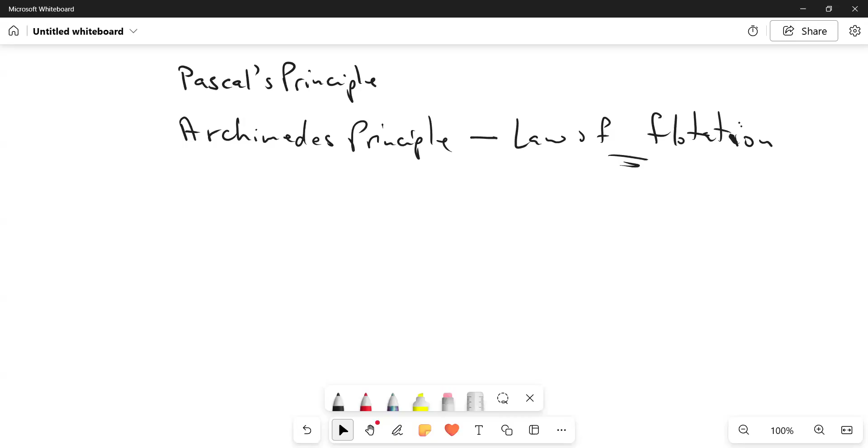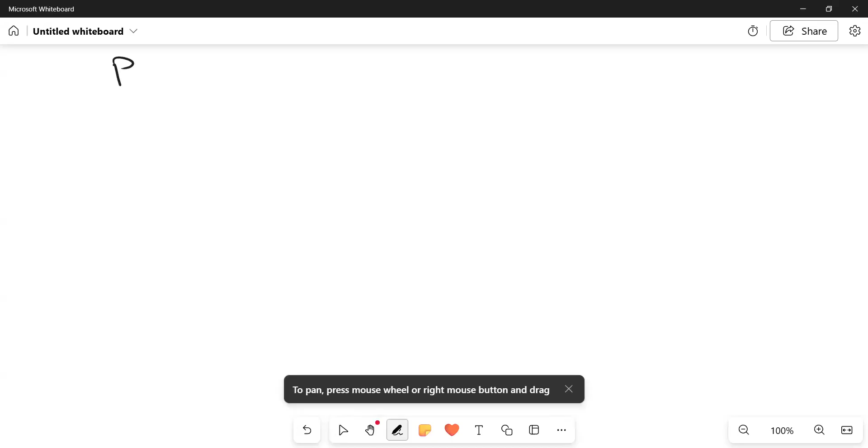So let's do this little bit here, right? And let's start with Pascal's principle. And I'll just give you a little. Let's see if I can. So we're starting with Pascal's principle, right? And I want to share with you a very practical setup that I think you probably visited a mechanic shop and you see this, right? You see this sort of thing. Give me a second. See if I can snip it. I'll bring it home.

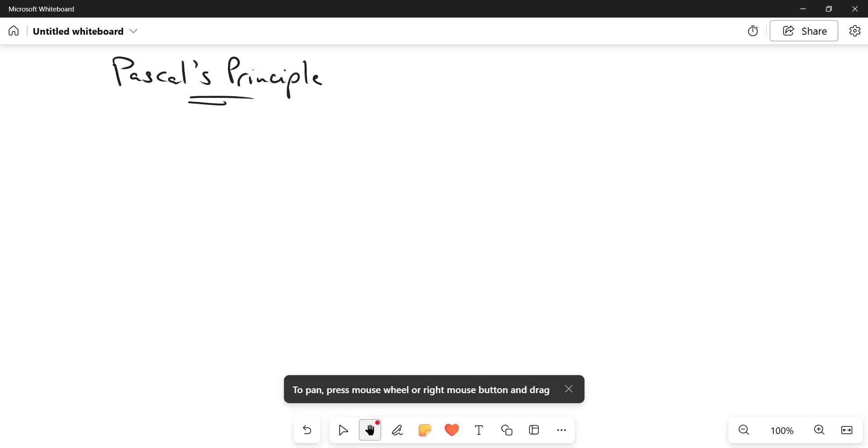Yeah. I don't know if you ever see this kind of setup. Not exactly this, but a little piece of equipment that they have inside of some of those established mechanic shops, right? Anybody ever saw something like this where they take the car in and there's a little mechanism there? It doesn't look exactly like you see here, but the whole idea is that they have a little piece of equipment and they put the vehicle on it. And a little guy would be cranking the thing with his hand, maybe.

Some of them are hand crank, some of them actually have a little bit of an electrical mechanism that would cause it to make the car rise up into the air. And they can go at the bottom of the car now and see what's going on. Anybody ever visited a shop and they did that with your vehicle? Yes, sir. Yes, sometimes, sir.

Let me just, yeah, it looks like this here. So they have something here and then something here, right? And there's some kind of mechanism down here that goes under the car. So here's the car. Okay, well, this is the ground, right? This is the ground here. The wheel is here. All right. Sometimes they take out the wheel and all of that. And this little mechanism here, they'll do something, and then next thing you know, this thing just goes up, right? Goes up. And the car is in the air.

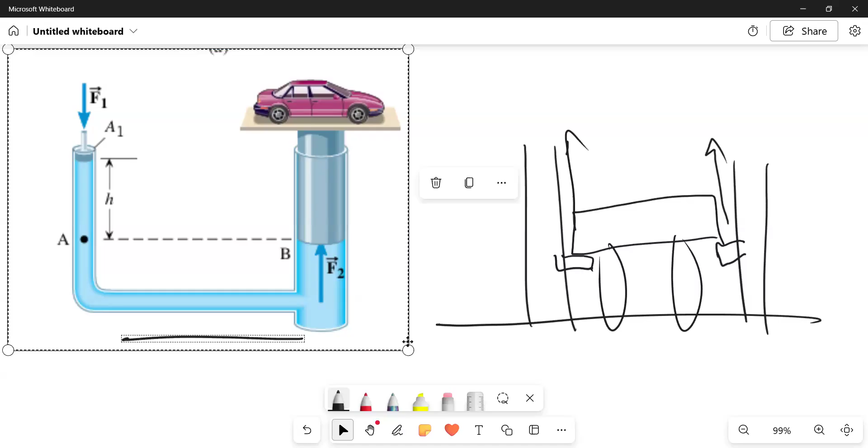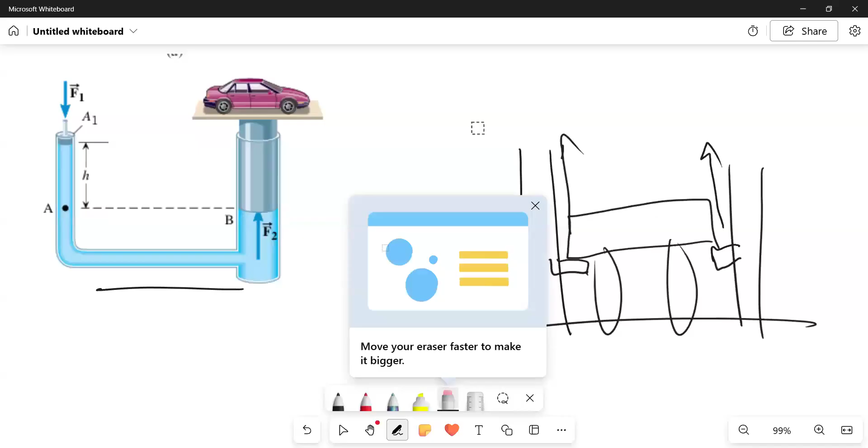Yeah. So this here is based on what we call Pascal's principle, right? And let me just bring over what Pascal's principle is all about. Or let me go back and I want to get rid of. Yeah. Pascal's principle basically is saying that, okay.

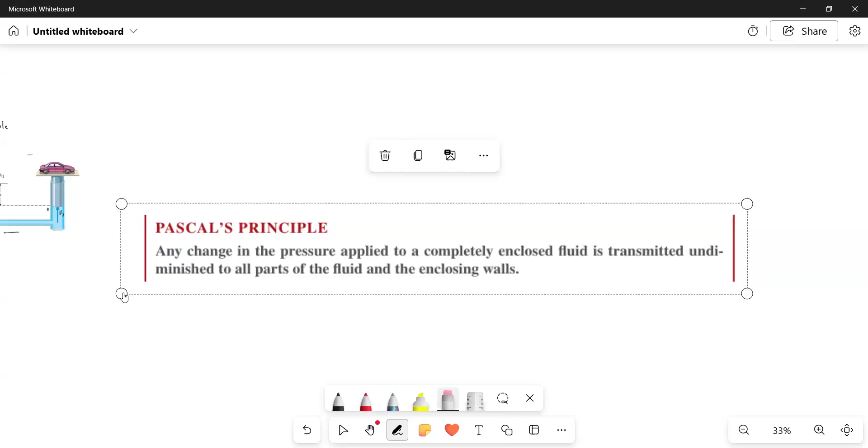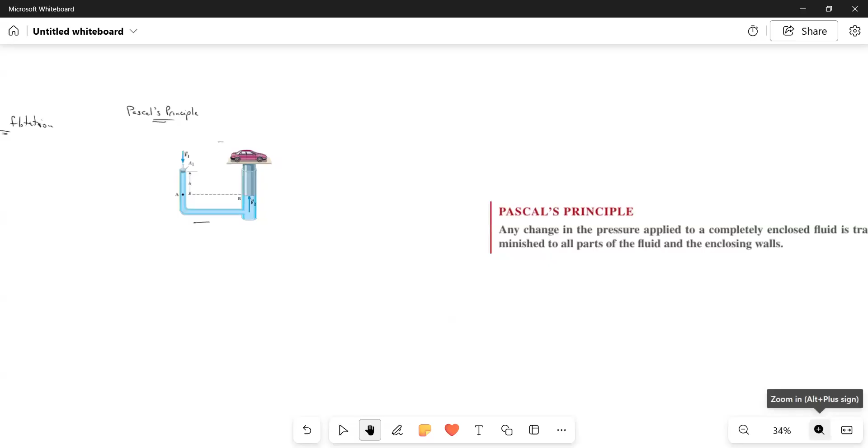I don't know why this. Hmm. All right. Yeah. I'll come back to that.

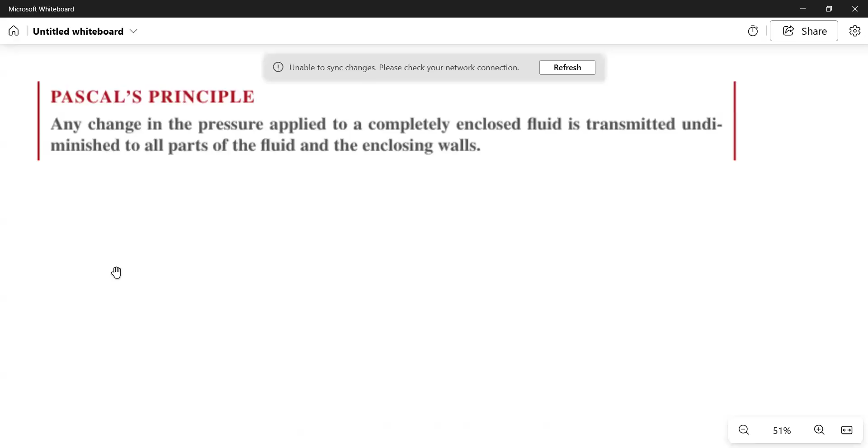Yeah. This is what Pascal's principle is saying. It's actually saying that if you have a change in the pressure applied to an enclosed fluid, that pressure is going to be transmitted to all parts of the fluid. So if there's a change in pressure in one part, it's going to transmit throughout the liquid, right? Or any fluid. It can be gas too, right?

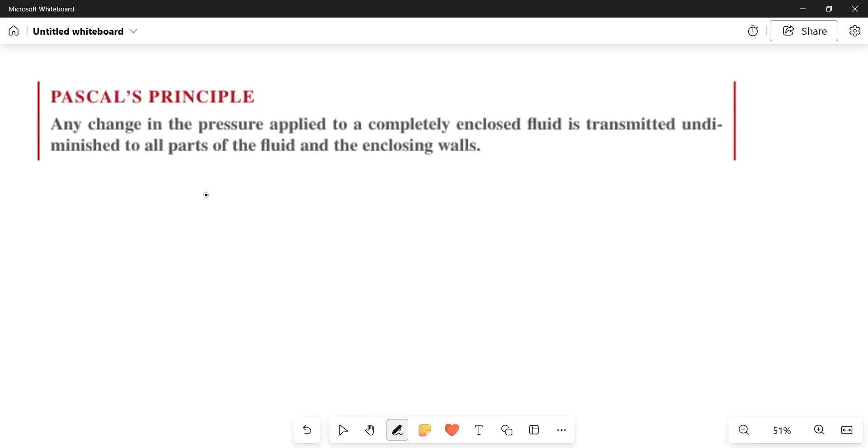So Pascal actually came up with this relationship. And he said that, look, of course, he did this mathematically, right? They take some measurements of pressures and so. And this is what he found out. He found out that, okay, if the force in one area of the fluid divided by the area of the fluid that it takes up, right, is equal to the force in the other area of the fluid over the magnitude of the area in that area, right?

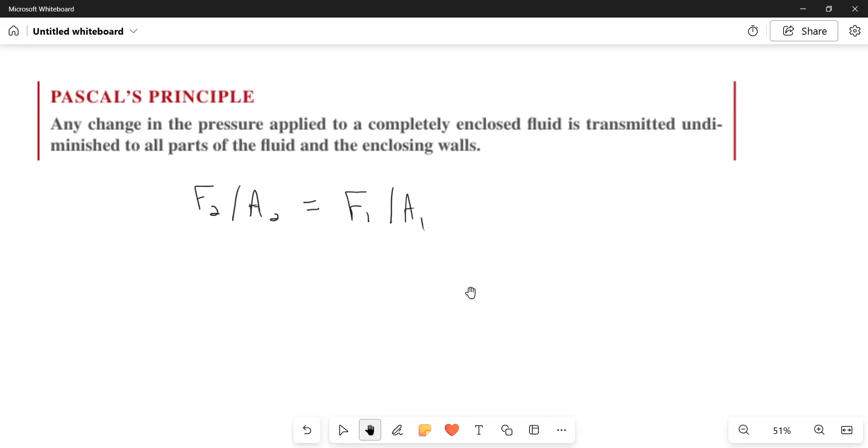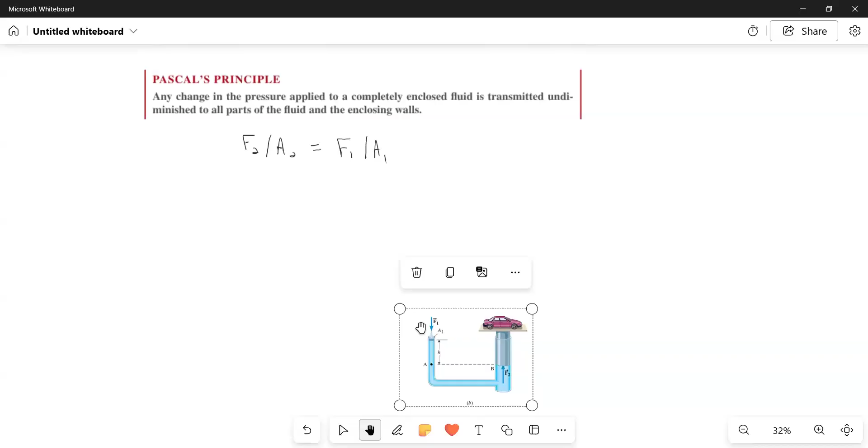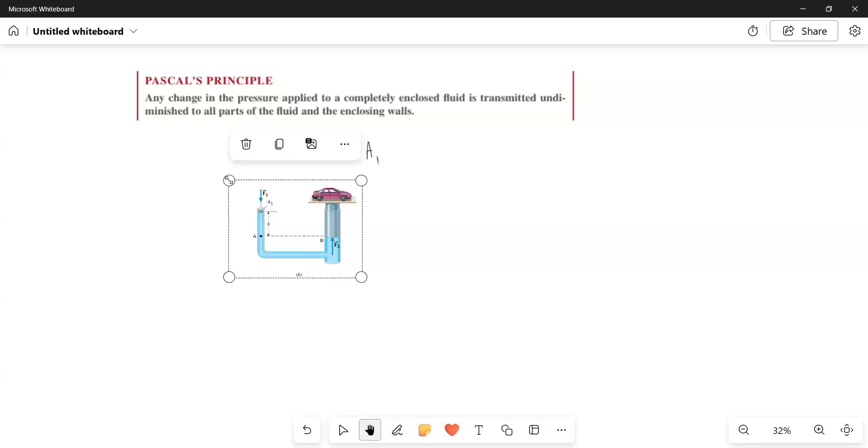So if I were to just, let me see if I can catch back this. See if I can take back this picture here. No, no. Yeah. Ah, man. I think I have to more use maybe, yeah. All right, let me get it here.

Yeah. So looking at this diagram here, right? And if we were to rearrange this whole arrangement here, right? What you would see here, I wonder what this is all about. Yeah. If you were to rearrange the formula, you will have F2 equal to F1 times A2 over A1, right? If you take this and you rearrange it, you get that, right? Mathematically.

So if you want to create a large force capable of lifting this car up, right? You want to create a very large force that would virtually lift up this car. You could use a very small force, right? I mean, comparatively small. But this is the part of the formula that you can manipulate. The area, or the cross-sectional area here as compared to the cross-sectional area here. The larger this area here compared to this area is going to multiply this force, right?

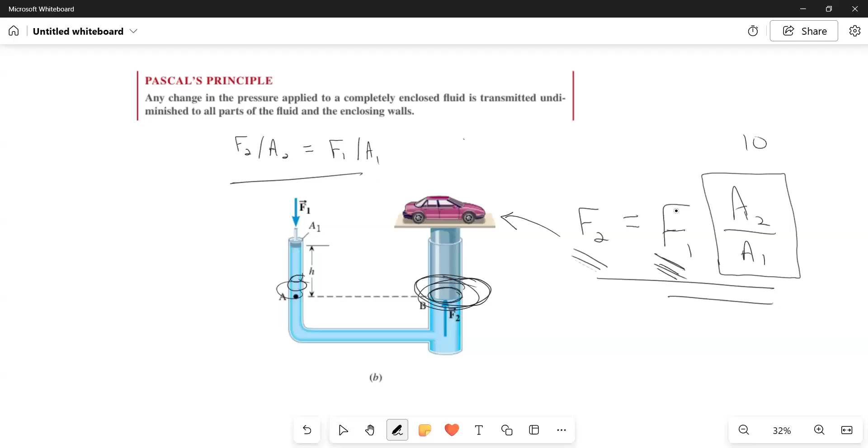So let's say the area of this part here compared to this part, it's 10 times. A2 over A1 is 10. What it does to this force, it multiplies the effect of this small force. So if you want to create, let's say, 10,000 newtons, you only have to have 1,000 newtons here, right? And because of the relationship of these two areas, if A2 over A1 is 10, you can actually exert a force of 10,000 newtons over here. This F1 that you're seeing here is going to be multiplied by 10.

And based on this principle, right? And it's true. It's generally true. I think in all of this, they didn't take into consideration all the weight of these pistons and so, right? But forget that. That's complex physics. But you can actually then multiply the effect of a small force.

And that's why, I don't know if y'all probably change a tire. Those small jacks. Oh yeah, I should have used that instead of the one in the mechanic shop. Most of you here, you know that small jack that you use to jack up the car? Most of you own one of that, right? And they have a little lever, and you crank it with your hand. And do you put a lot of force into that thing? Anybody use it before?

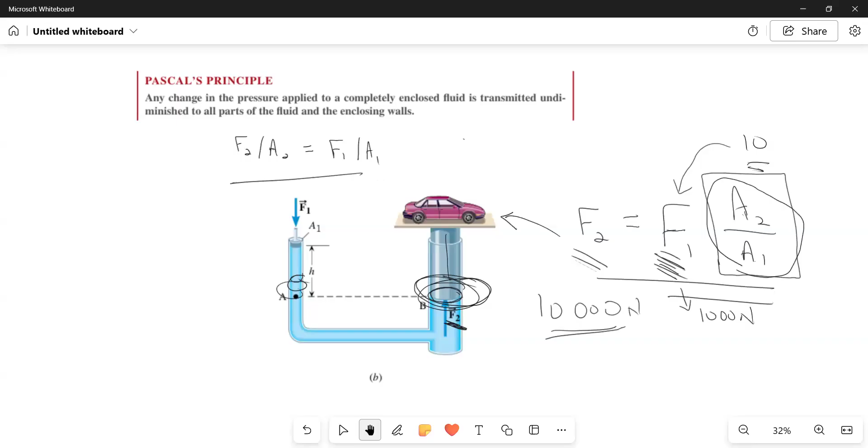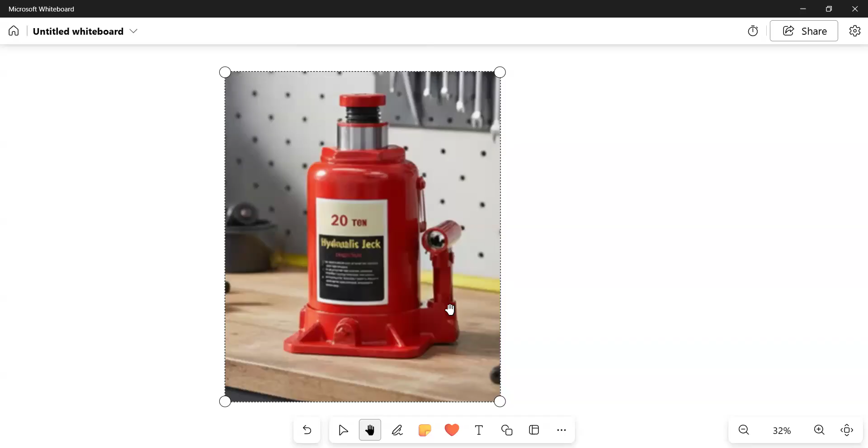You notice here, well, what is happening? It's not showing here, but in this tube here, in this part of the crank, you notice how the area is small? Y'all notice that? Good. This bore here. The cross-sectional area of the bore is very small, but look at the cross-sectional area here. It's probably about 100 times the cross-sectional area here. It's like this compared to this. Times 100. Right? That's all.

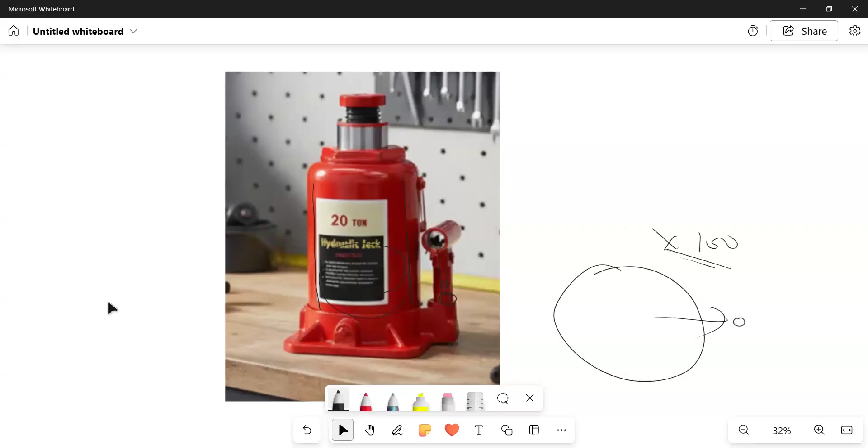So whatever force you exert on this small crank here is multiplied by, let's say, 100. You get what I'm saying? And that's what Pascal's principle is saying. I wonder why the class seems like they're lost or something like that. Yeah, so that's the principle here, right?

You could use a very small force, but in the equipment you're using, the area of this part here compared to this part here is a big fraction. A2 over A1 is a very large number, probably 10, 100, as I showed you in this case here. In this case, the cross section of this bore here, where you are cranking the oil inside there, right? And remember, there's oil inside this thing. So you're going to exert a small force here, and it's going to translate into a large force here.

And granted, your hand is going to work a lot, but then you see the car moving little by little, right? So it doesn't move fast, but it moves slowly up. Speed is not what you want. You want to multiply force. And you have the car lifted up.

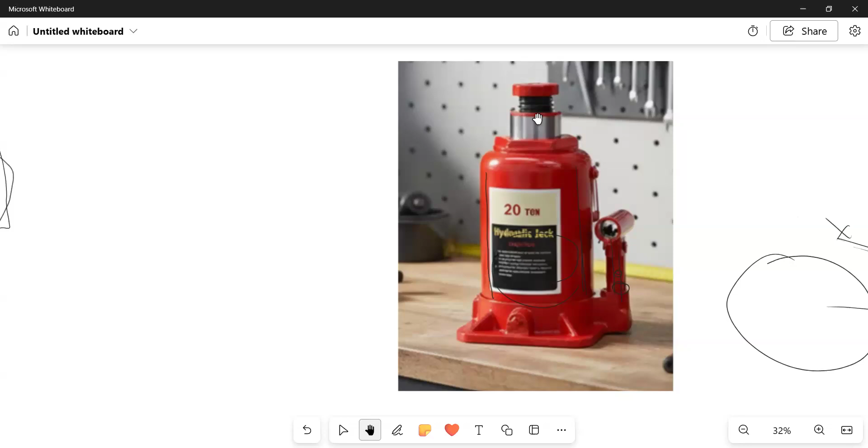Right? The other day, one of the posts on my house was rotten at the bottom. And I bought, I think it was a 10-ton jack. And I actually lifted the whole house, the front. I lifted the whole thing up. And I cut out the bottom of the post and I put in a piece of wood and I painted it up nice, and that's it. So I lifted my house up. Just imagine. Why? Go right back to Pascal's principle.

Anybody? I remember talking to this class, and some people were saying how they worked in industry, so does anybody work with this kind of thing? Anybody work at maybe a workshop where such a device is used? Nobody?

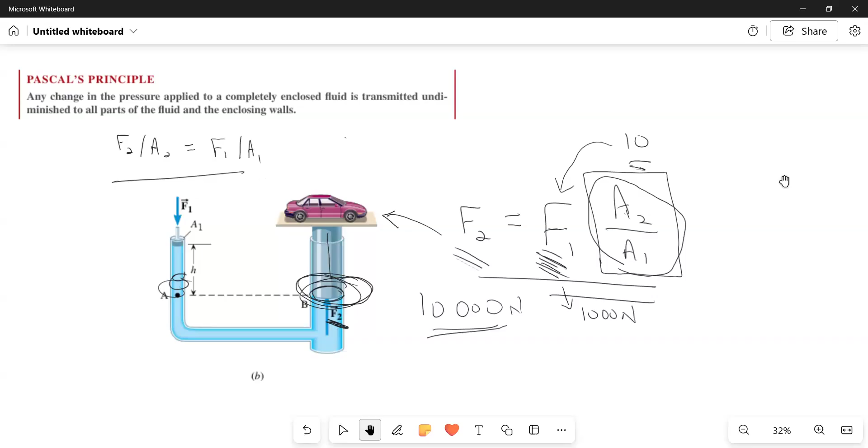Hmm. All right. So something strange with the class this afternoon. We're probably not getting the kind of... Yes, the persons who work in the industry that you're speaking about are at work. Yeah, yeah. All right. Because most times they work from 6 to 6. Yeah. Well, that's the next thing, y'all gotta get your union involved, and well, God knows if you have a union there. But oh my.

When you've got to work those long hours, I mean, if from time to time you do it, yes, but... well, I wonder why this thing is.

Let me see if I use Control V. Yeah, this is what I'm talking about.

You can't do that every day. You know, people forget something called family life and all of that. You need to have some time to yourself and so on. You can't work from morning till night. You have to have time for the family, and that's why you want to develop yourself to the point where you don't have to work those long hours because of your skill and your knowledge. You could work for less hours, right?

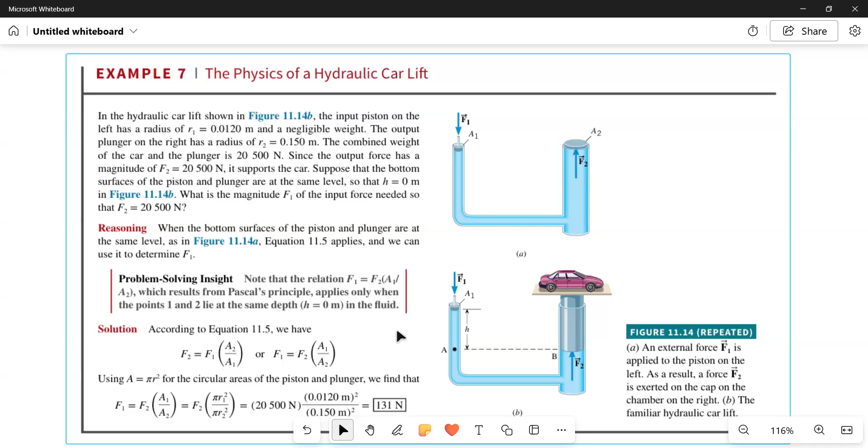The weight is 20,500. So you want to make sure that you can lift that car that has a weight of 20,500. So we're using the formula here, and notice we rearrange the formula so you can find F1. In this case, you didn't want to find F2, you want to find F1. So F1 is going to be equal to F2 times A1 over A2. Notice the switch around. It's not A2 over A1 this time, it's A1 over A2. If you know a little bit of mathematics, you'll understand why.

Good. So for F1, you put in all the numbers. F2 is 20,500. A1 is given as 0.012. A2 is given as 0.15. Oh, by the way, that's the radius. You have to find the area. Area is pi r squared, the area of a circle. So they give you the radius, you have to calculate the area. Put all those numbers in and look what happens.

F1 turns out to be 131 newtons, which is not very much, right? If you want to put this in terms of a mass, divide this by 10, it's about 13 kilograms. The amount of force that you would need to lift 13 kilograms. 13 kilograms is about 30 pounds. So if you were to lift an equivalent of 30 pounds, you only need that to lift this big car.

Just imagine. The amount of force you have to exert is less than lifting 30 pounds, all because of the physics. This little device harnesses an idea in physics, and we're able to lift that car and work underneath it. The mechanism they have is more practical. This one is very impractical. Lifting the car up there doesn't help you to see underneath. But the one they have in the workshops allows you to go underneath there.

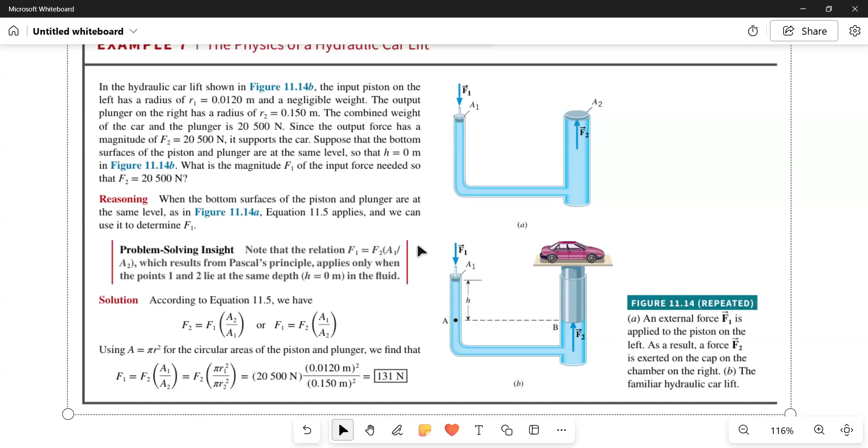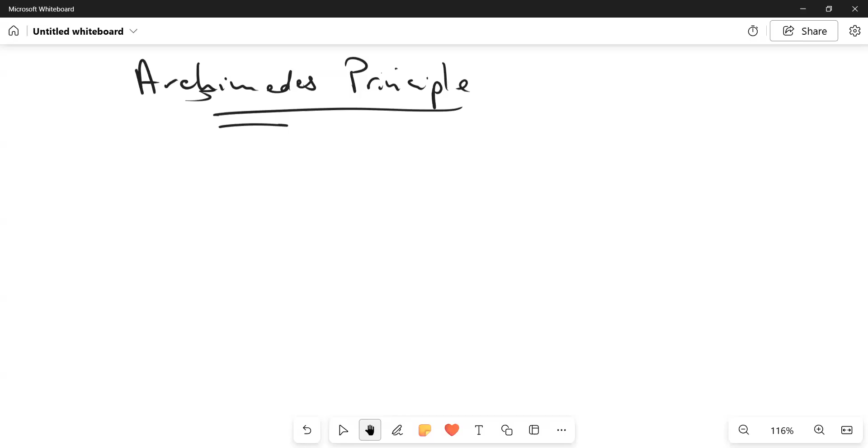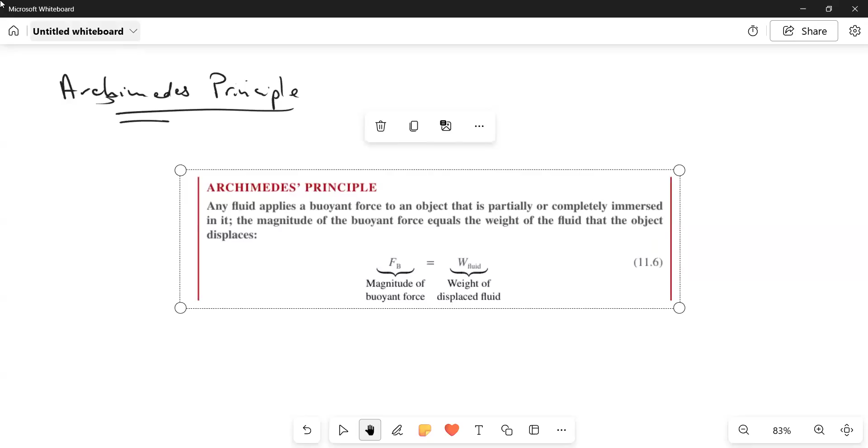I want to move away from this now and talk a little about Archimedes' principle. Archimedes was an old Greek scientist. And Archimedes' principle basically says this. Let me take it from the notes we had over here. Everybody can see that? Yes, sir.

So what Archimedes is basically saying is that when a body is immersed in a fluid, it will experience a certain amount of upthrust. That fluid is going to push up at that body, right? And you can have two situations. Well, before I go to that,

there's a really humorous story. Anybody know the story about Archimedes? Yes, sir. What was it all about? Give me a little bit there. Basically, he was in a bathtub and he realized that when he goes into the bathtub, some amount of water is being displaced. And then he figured out that it's proportionally displaced.

Okay, yes, that's in a nutshell. The background to it was that the king he was serving at the time suspected or wanted to know, "I'm giving these people to make jewelry for me." He would give goldsmiths gold to make jewelry for him. And he was wondering whether the goldsmiths would actually dupe him and mix in certain other metals, maybe put a lot of copper in the inside of the gold,

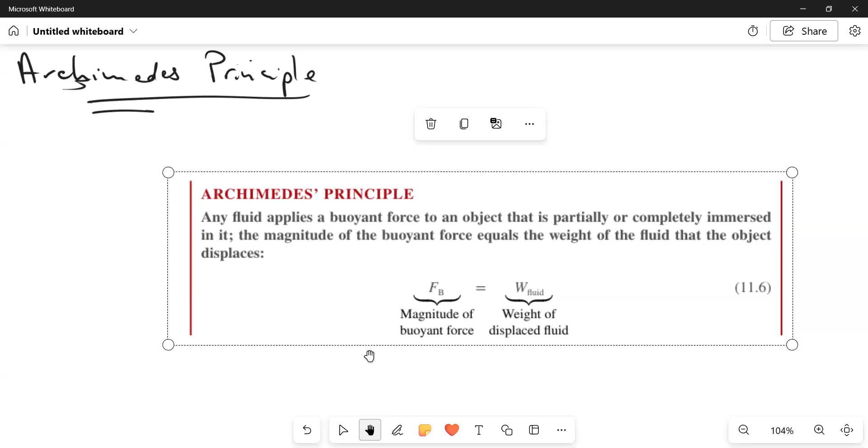And therefore, a crown that is made of copper is going to experience, if you were to put them, let me just show you. There is one theory. Let me just draw that. There's one theory that Archimedes could have taken two identical containers with water, right? Put up a balance here. Okay, he has a balance. And you tie on the gold, okay.

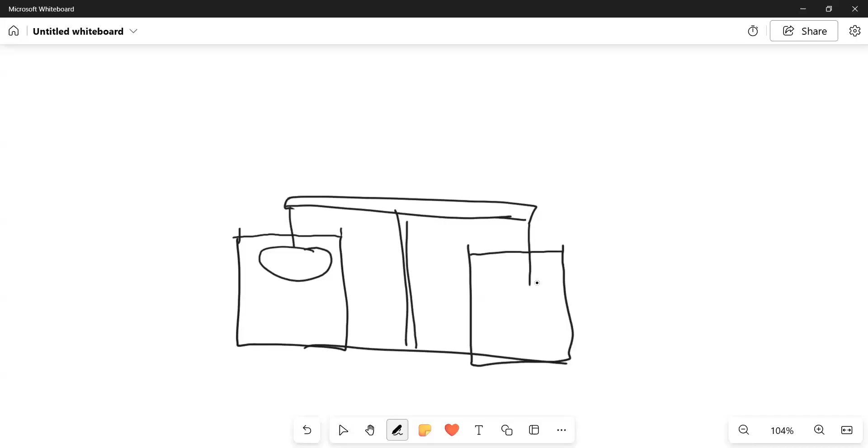The water is there, all right. So the thing will dunk in water, right? And then up here, water. And you tie on the crown that is made of, let's say this one is more copper, right? I mean, gold plus copper. Let's say this one is pure gold, right? Pure gold. What do you think will happen when he starts off the experiment here? What do you think will happen?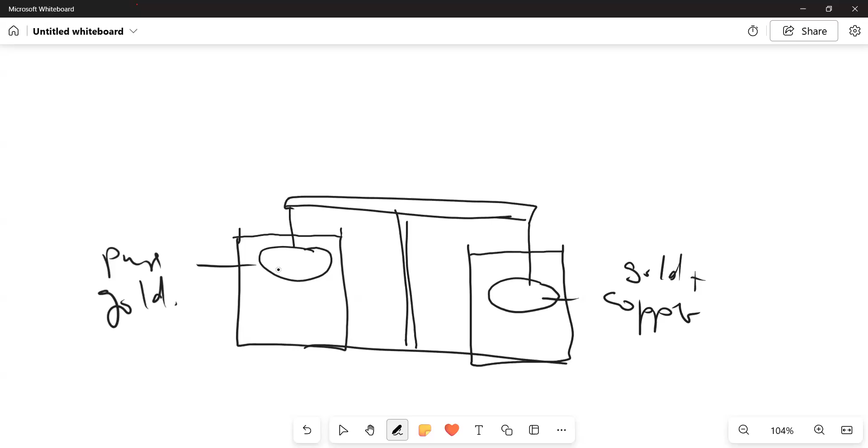So these two gold crowns really are identical, right? What will happen? The heavier one, the one made of pure gold, would go down. Yes, and this one will go up. Yeah, right? As a matter of fact, you don't even need to put the thing in water. I would think just air, just immerse it in air and compare the two, right?

And the pure gold is going to be heavier than the one with gold plus copper. You understand? It's going to be heavier based on the density, right? Based on the density. So yeah, he didn't even need the fluid, right? He didn't need the fluid. I don't know why he insisted on it.

Yeah, he came up with this idea and he was able to determine whether... I don't know the true story. These stories are told over and over and over, and you don't know what is fact from fiction anymore with these things. Yeah. So Archimedes came up with that idea that

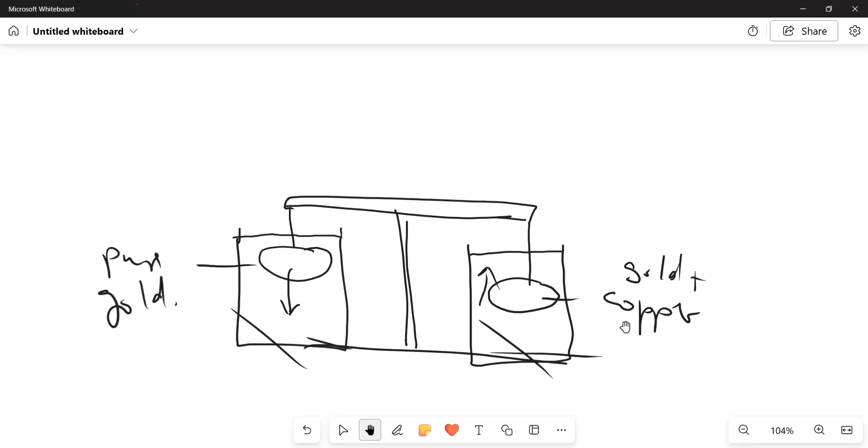objects would experience a certain upthrust, right? They'd experience an upthrust, and that upthrust, it's related. Let me just go back and see if I can. In the notes I gave you, I don't know if the formula is there somewhere in the notes.

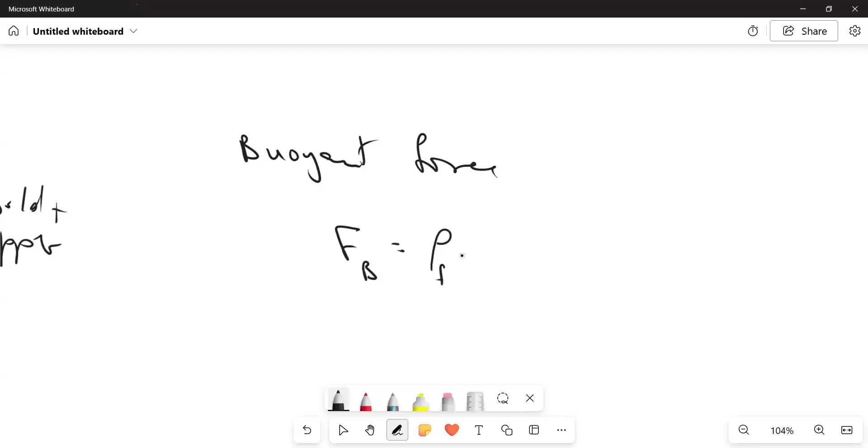The upthrust, which they call the buoyant force. Buoyant. I think I spelled the word wrong here. Funny how this word is spelled, right? This word is spelled B-U-O-Y. The buoyant force experienced is actually equal to the density of the fluid times the volume of the fluid displaced times g, right?

That's the buoyant force that is going to be exerted on this object that you immerse inside of a fluid, right? So whatever is the density of the fluid, here it's water. How much volume is displaced, right? And g is acceleration due to gravity.

So what this would mean is that when you immerse things in water, if you were to take... so this is water here, right? You were to put an object inside here, and you were to tie it to a string, and on this string had a force meter. They're called Newton meters, right? A force measurer or a Newton meter.

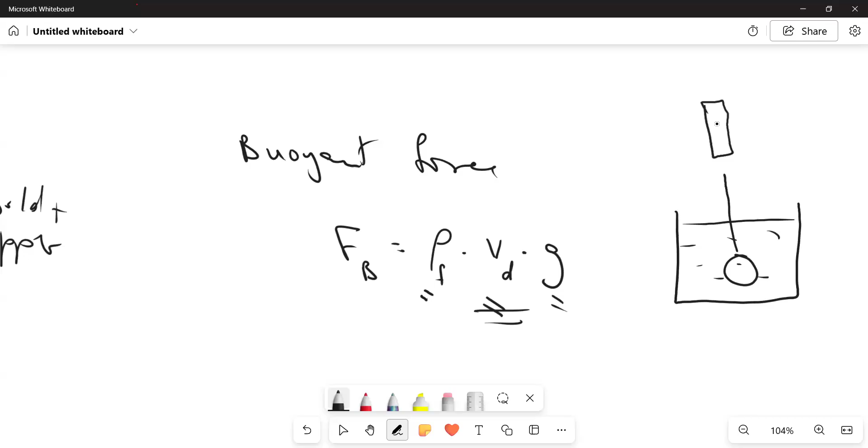So you have a little... it resembles that thing that some people have. It has a hook here, and the thing hooks on there, and it will have a calibration here. So if you were to weigh this stone, and maybe it's 1 kilogram, when you put it in the fluid, it's not going to weigh 1 kilogram anymore, right? It's going to weigh a little less.

Why? Because there's a buoyant force pushing up on this object here, right? F_B. It's going to push up on that object. I think I'm giving you the raw... This is a force measurer or a Newton meter, so it will normally register in newtons, right? So let's say the weight of the object is 10 newtons.

You might find that when you put it in a fluid, it's now 8 newtons. Why? Because it experiences a 2 newton buoyant force, right? So now the weight of the object is just 8 newtons. It's a little lighter. And how does that come about? Well, it displaces fluid, right? Okay, let me explain why that happens.

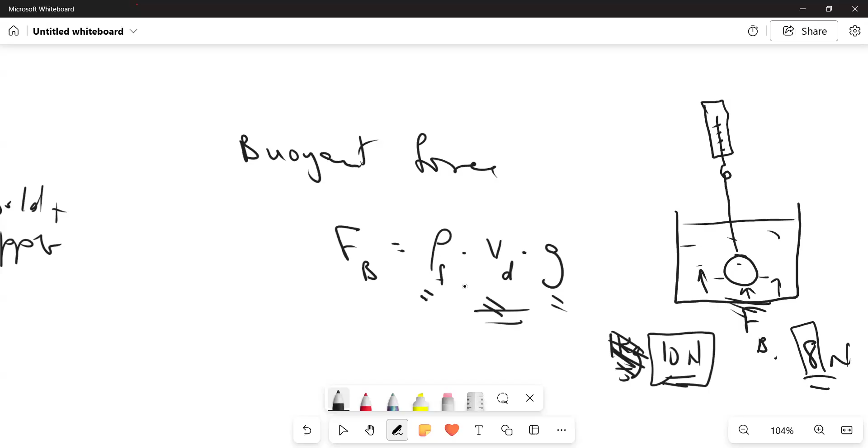Let me see if I can draw that. All right, so let's say the level of the water here is there. So you put a stone inside this water now, right? The water wouldn't be at this level anymore. No, it's going to be a little higher, right? So the water is going to come up to here now, a little higher than down here.

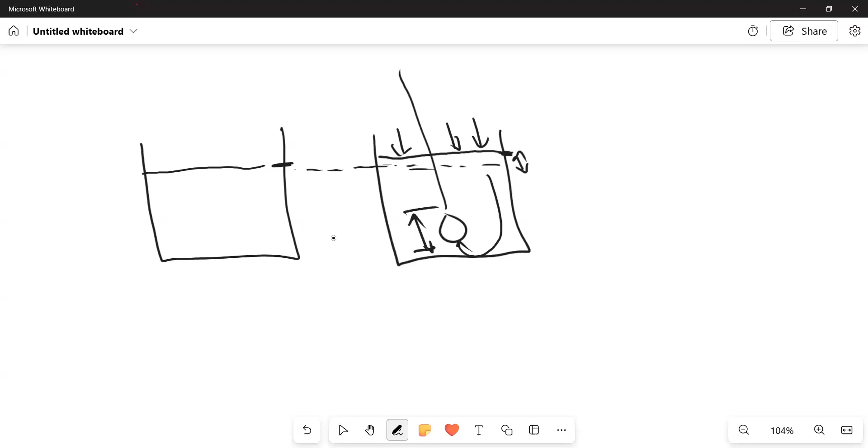Now this difference, because the water actually is a little higher, the pressure above here is going to push back at that water, and that pressure is translated to that object, right? As a matter of fact, there is a pressure difference from here to here. Remember we talked about P = hρg? And that pressure difference is what is going to cause an upthrust force, depending on the area. We use a spherical object here.

But if you were to use a cylindrical object, you could actually calculate the pressure difference, right? And know that force that's going to push up on that object. We're not going to do too much of the mathematics, but I'm just showing you where that force originates, right?

Because of this displaced water, remember the atmospheric pressure is pushing back at that water, and that's going to create a force that would give this object an upthrust. You can also think about it: the difference between the pressure up here and the pressure down there creates an upthrust, pushing it upwards, because of that pressure difference.

By the way, this has a lot of uses, right, a lot of uses. Anybody here lives in an area where they do cane cultivation? Yes, sir. And you would know that we make use of punts. You hear of that word, punts? Yeah, we make use of punts. What we do is that we pack the cane in punts and we float them in the canals to the estate, right?

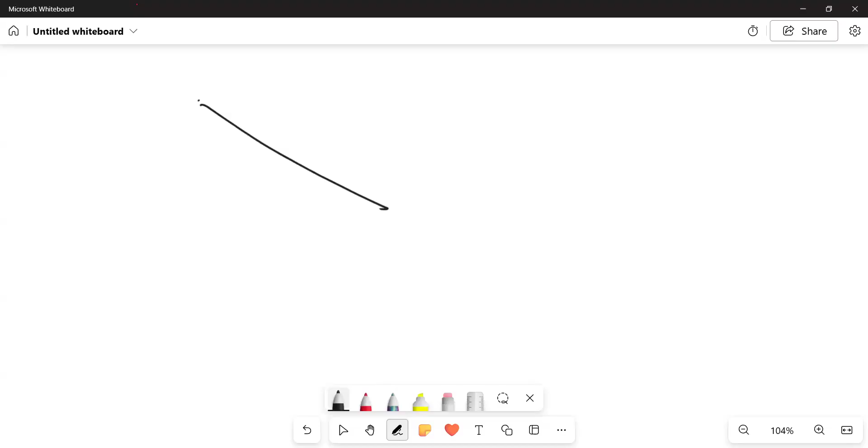plate of steel, roughly, right? Let's say it's 1 meter by 1 meter, and the thickness of the steel is, let's say, 0.01 of a meter, right? Which is like what? Oh, that's too much. That's like 1 cm. That's rather thick. All right, let's go with that anyway. It's not a very good example.

Good. So if you were to take this steel plate, the volume of this thing will be about what? 1 by 1 by this will be what? 0.01 meter cube, right? That's the volume, V. And the density of steel is, let me go with a number like this, 7,850, right? The internet gave me this one. 7,850 kilograms per meter cube.

So when you think of the upthrust that is going to be experienced, let me go with the mass or the weight, right? The mass is going to be equal to 7,850 times 0.01 kilograms, right? Which is roughly 78.5 kilograms. I hope I'm getting all my numbers right. Yes, sir, it's right. Good. So the mass of this piece of steel is this.

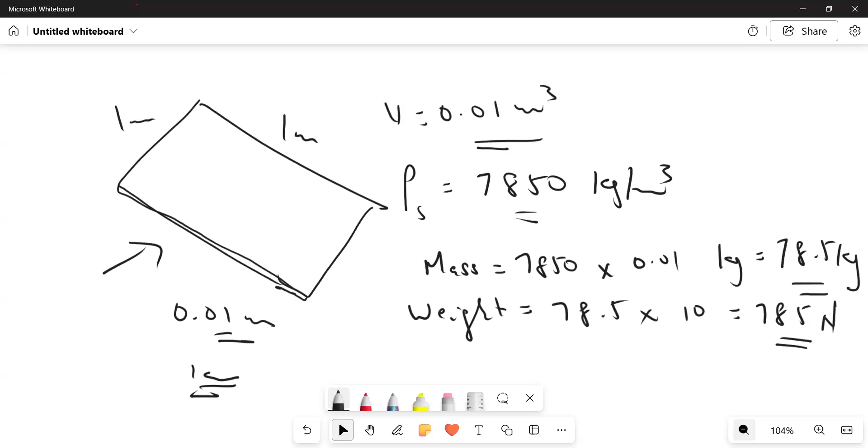So the weight, if you were to multiply that 78.5 by, let me go with 10 now, just to give a nice number, as acceleration due to gravity, it's going to be equal to 785 newtons. So that's the weight of this piece of steel. Now, if you take this thing and you put it in water, what will be the upthrust? Let me see if I can make it smaller. Good. So the weight of this steel is 785 newtons.

The upthrust, we just talked about it, right? The buoyant force that it's going to experience. What's the formula we got? I just gave you it. Density of the fluid times the volume displaced times g, right? Good. So let's say we put this thing in water, right? What happens now? So let's see.

The density of water is roughly 1,000, times the volume displaced, which will be the same, 0.01, times, let's go with 10, and we'll get roughly 100 newtons. Yes, sir, 100 newtons. Good. So look at this. The weight of this steel plate is 785 newtons. The buoyant force or the upthrust is going to be 100 newtons.

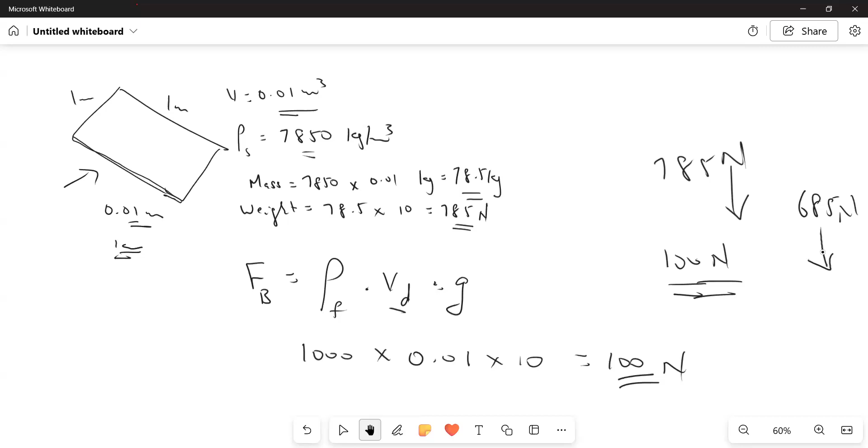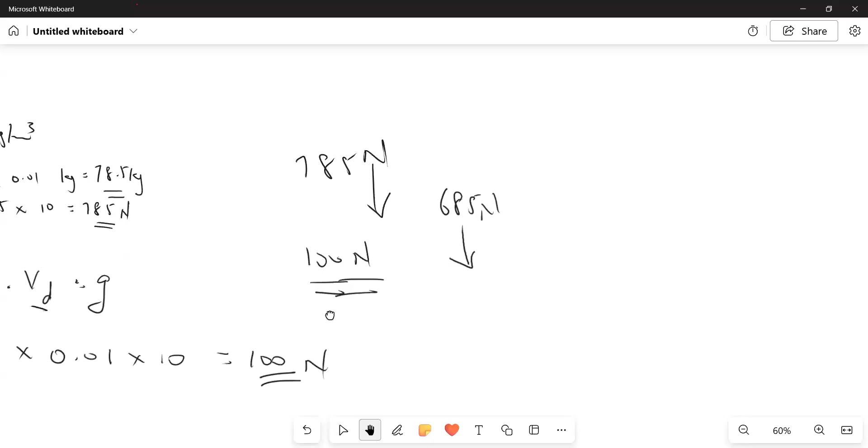However, you are noticing here that over and over we are talking about density. Right? And some smart Alec decided, man, what about if we take this steel plate and we were to bend it, like this.

Right? And so all of here will be air, right? Will be air. And air has a density of, let me Google it. I think I Googled it. What's the density of air? Density of air is roughly 1 point... What do you have here? 1.225. That's what you have, right? Good. So what would happen now?

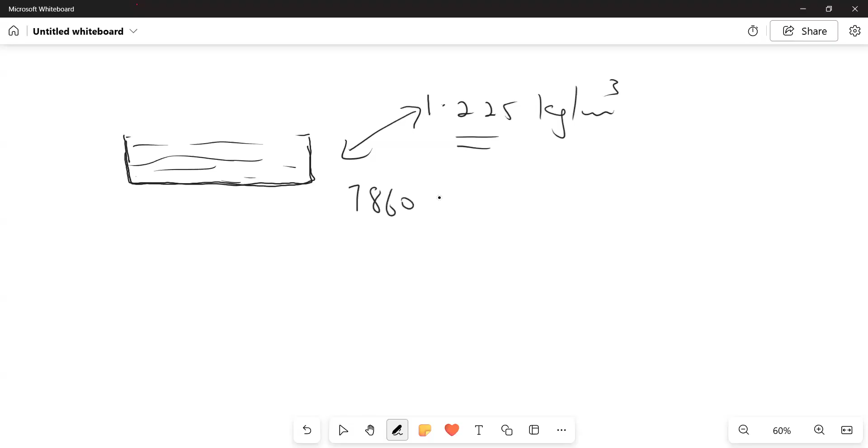When you look at the density of the material and compare it with the density of the air, right? So the material had a density of, what was it? 7,800 and was it 60 or 50 kilogram per meter cube, right? How much is it? 7,850. Oh, 50. All right, good. So because of the low density of air, the average density now here, remember what I didn't mention, and you're supposed to figure that out, that when an object is denser than water, it sinks. When an object is less dense than water, it tends to float, right?

So because of this shape of this container now, you take the metal and you shape it like this. So you trap some air in here. Remember water, the density is 1,000 kilograms per meter cube. So your aim then is to shape this container such that the average density, not just the steel, but the air inside here must actually be less than 1,000 kilograms per meter cube. And once that happens, this container is going to float. Is that clear?

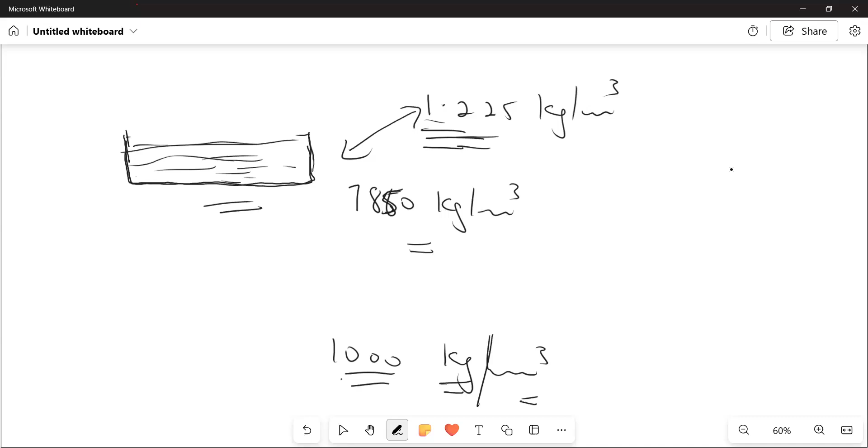So there's a bit of mathematics involved, right? As to how much air you would have, because if you were to barely bend it to the end, the air in here may not be enough. So it will depend on the dimensions. What if I should try? All right. Let me try with a bit of calculation and see if we can.

Just keep in mind at the corner here that water has a density of 1,000 kilogram per meter cube, right? Good. So just now we had the steel plate down here. What was it? 785 newtons. Let's keep that, right? Let's say we were to put on a wall like here, a wall here, and let's say it's 1 meter high. I'm not sure whether it will work with 1 meter, but let's go with 1 meter. That's like about 3 feet.

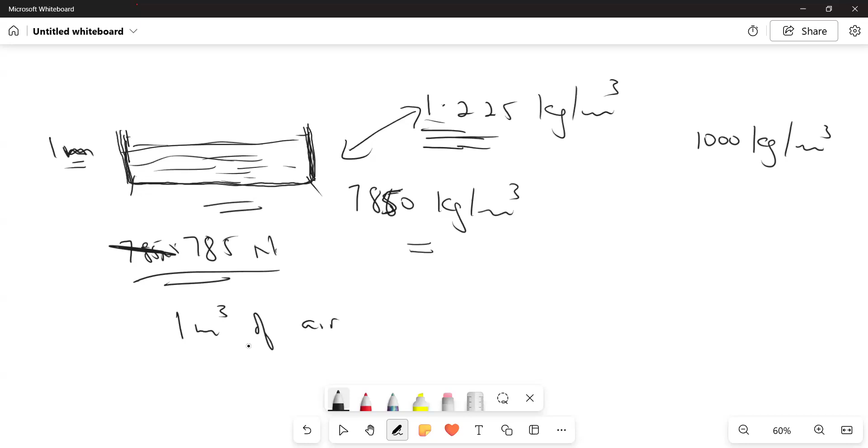Good. So let's see if we can calculate. 1 meter by 1 meter by 1 meter. So we got 1 meter cube of air now, right? Remember, the steel plate is 1 meter by 1 meter. I'm going to neglect the weight of the wall, just for simplicity's sake. So we have inside here 1 meter cube of air. Is that clear? So let's say we want the weight of the air. What will that be?

1.225 by 1 meter cube, by, let's go with 10 for g. What will we get here? The weight of the air. Sir, 12.25. All right, 12.25 newtons. And by the way, I must make a point here. I'm not sure whether 1 meter here is going to make this thing float. But I'm just using 1 meter, right?

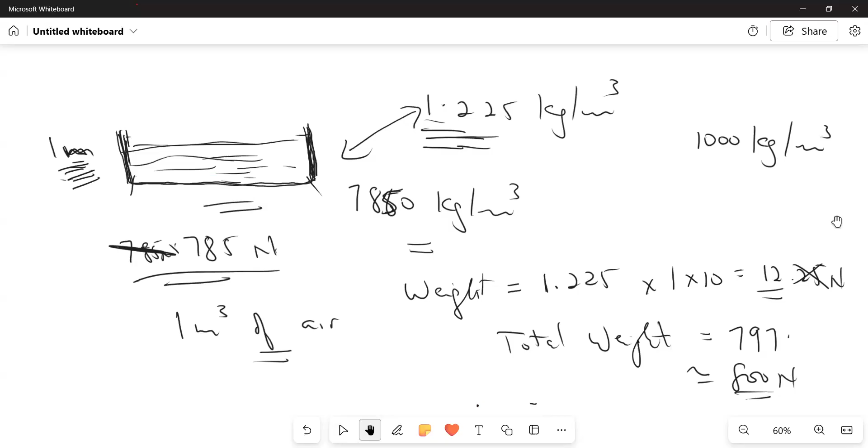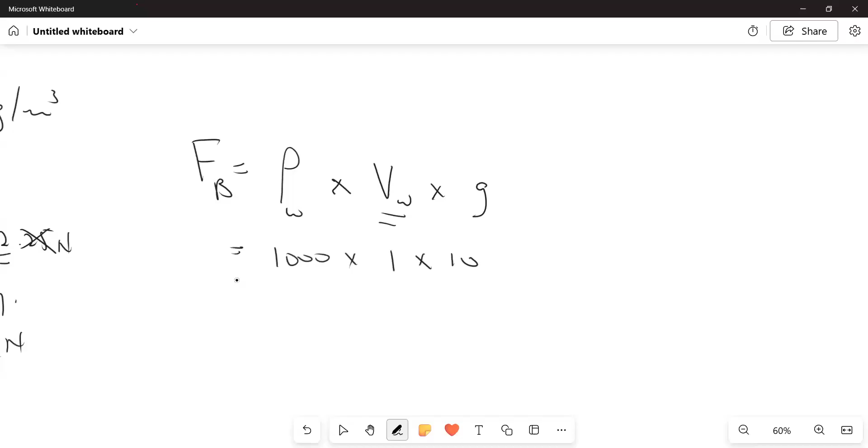Now, what volume of water is going to be displaced? Remember we said the upthrust, FB, is going to be equal to the density of the water multiplied by the volume of water displaced times g, gravity. Density of water is 1,000. 1 meter cube of water is displaced when you put that thing in water. Multiply by 10. So we now have an upthrust of 10,000 newtons. Miracle of miracles now. You see that?

The weight of the steel container that we made by putting on a bit of siding is 800 newtons. And the upthrust is 10,000. I think something is wrong here. Volume is 1. G is 10. Something doesn't seem right. The numbers seem too fantastic. I wonder whether we missed something here. Anyway, the point is the upthrust is far more than the weight of the steel object, and therefore it's going to float.

So something seems odd about this 10,000. 1,000 by 10 is 10,000. Yeah. Density of water is 1,000. The volume is 1 meter cube.

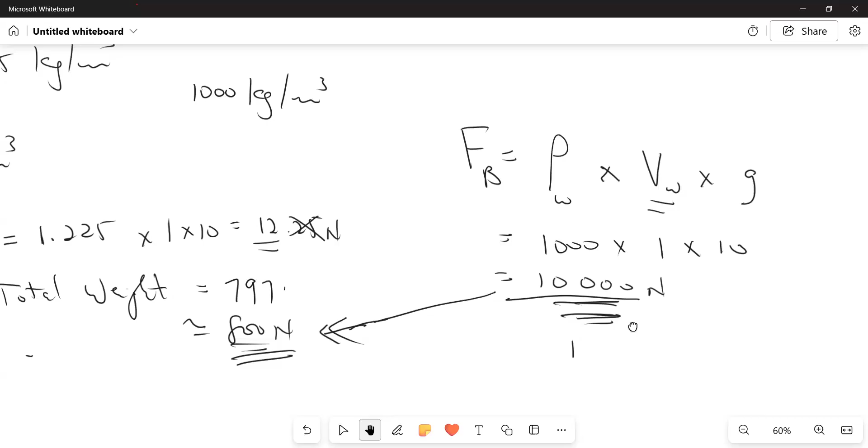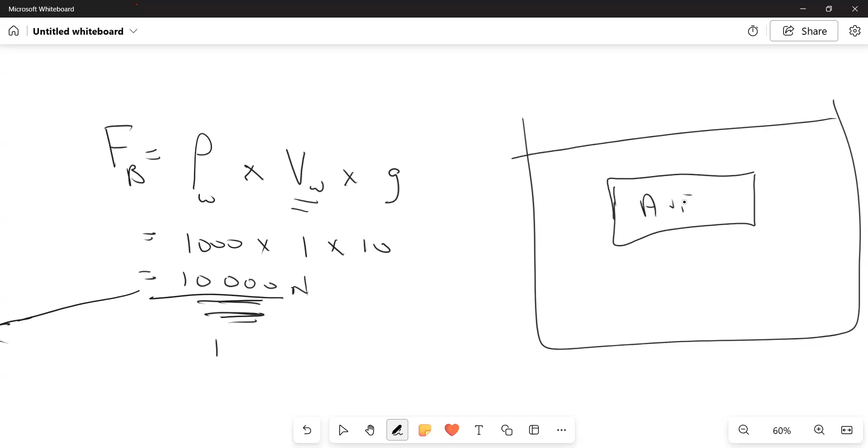All right. I think there's something I need to point out, right? If you were to take this object, I want to point out something to you that probably you don't realize is happening. If I were to take a big container of water and I take this object and force it down, right? Oh, by the way, if it's enclosed totally, there's air inside. And I were to force it down into the water. The upthrust here, while the weight is 800 newtons, the upthrust is going to be 10,000 newtons.

And have you ever tried this? You take a closed bottle and push it down in water. Do you notice that something is pressing it up? Yes, sir. It shoots back up. Good. So I want to tell you now that our object is not going to actually experience this amount of upthrust unless we push it down underwater. What will happen is it's going to float, right?

And when it floats, that brings us to something else, the law of flotation. So the water is going to exert 10,000 newtons on this thing only if you were to push it below the surface. What's going to happen is that the water is going to push with whatever is needed to keep it afloat, because all this object needs is 800 newtons. So 800 newtons is going to press up on this object and it's going to float on top there. Now that brings us to the law of flotation, right?

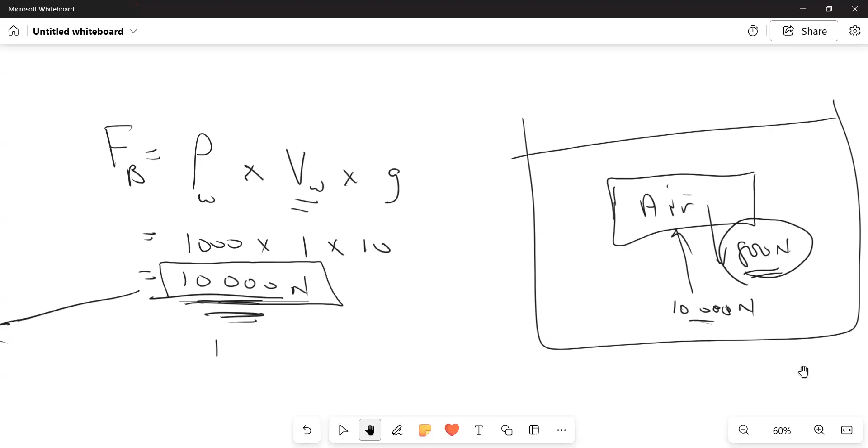It's not going to exert 10,000 newtons. Let me show you what's going to happen. You have this big container of water, you put this object inside, got air inside here, right? You're going to find that the object is going to float in this water. The weight of it is around 800 newtons, and the upthrust on it, just what is needed, the 800 newtons, is going to be exerted to keep it there. If you were to try to push the object below the surface, the full 10,000 newtons is going to come into play. But just 800 of the upthrust is needed to keep it afloat.

Now that brings us to the law of flotation, right? The law of flotation is basically saying that an object that floats in a fluid displaces its weight, right? So that's a simple way of putting the law of flotation. Once an object is floating in a fluid, the amount of fluid that it will displace will be equal to its weight, right?

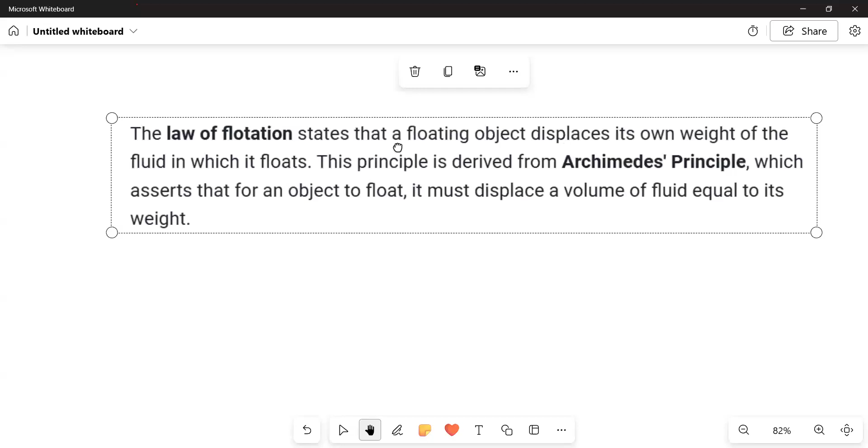Right. So this is a simple statement of the law of flotation, that a floating object displaces its own weight of the fluid in which it floats. And it's not a new law, as this is saying. It really comes from Archimedes' principle. So all that has to happen when an object floats is that the displaced fluid must equal the weight of the object.

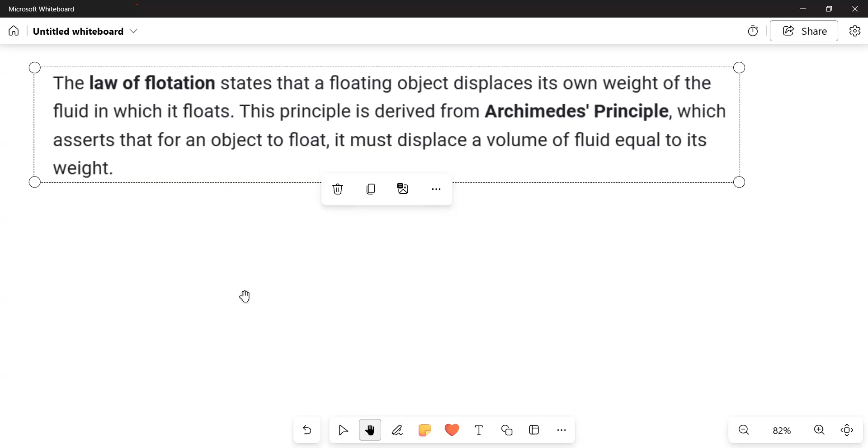And one of the things, I don't know if you ever noticed things floating in a fluid. Let's say water. Let me draw something here. So this is water here. Does the thing float on top there like this? Does it float like that? Anything floats like that? Sir.

Somebody saying yes, no, what are you saying? Sir, no, sir, they're like the beach balls, the plastic balls. They float on top like that? Honestly, this is the closest thing I could find because it does kind of have a little bit inside the water, but it floats to the very top.

Sir, how about a bottle container? No, anything that you're talking about. Well, there is very careful observation. Please, you can always do this on your own and see, right? It never floats like this, right? You always have situations like this where, okay, this is the fluid, and no matter how light the thing is, there's always a piece under there, and I'll tell you why just now, right?

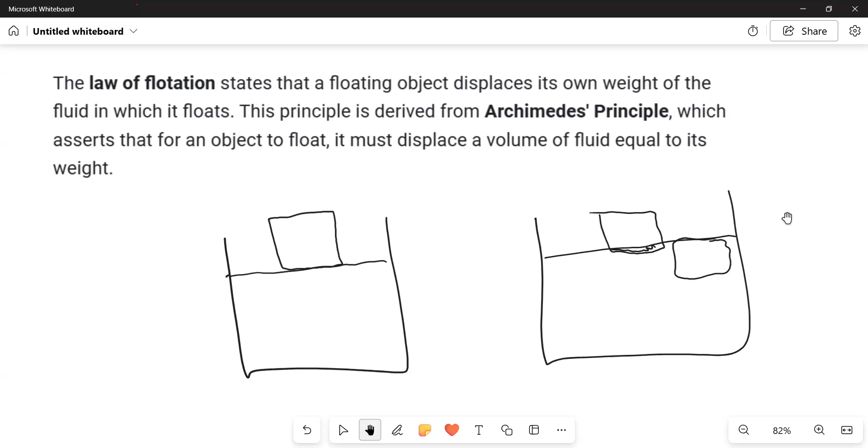As well as you can have a situation where the whole thing floats on top and the whole thing is submerged, right? Now, what determines how much of the thing is submerged? What determines that? Sir, the content of whatever it's inside of, the weight. Throughout our discussion, you would notice that density is always involved, right? Density. And depending on the density, there's a formula. I want to just put that formula up here, right?

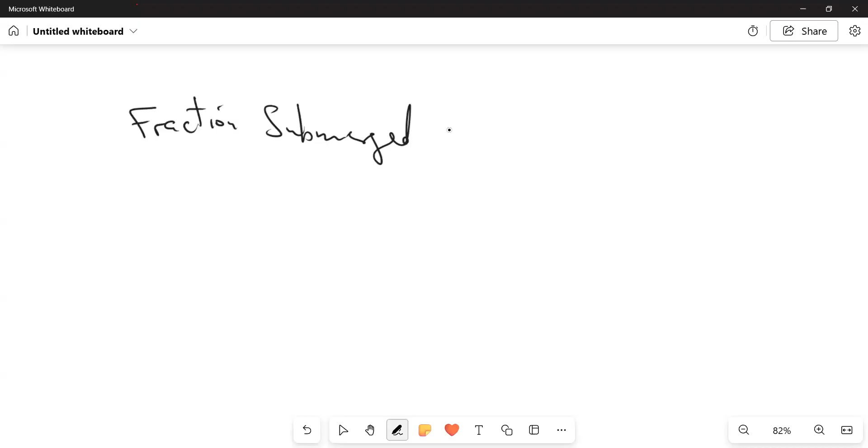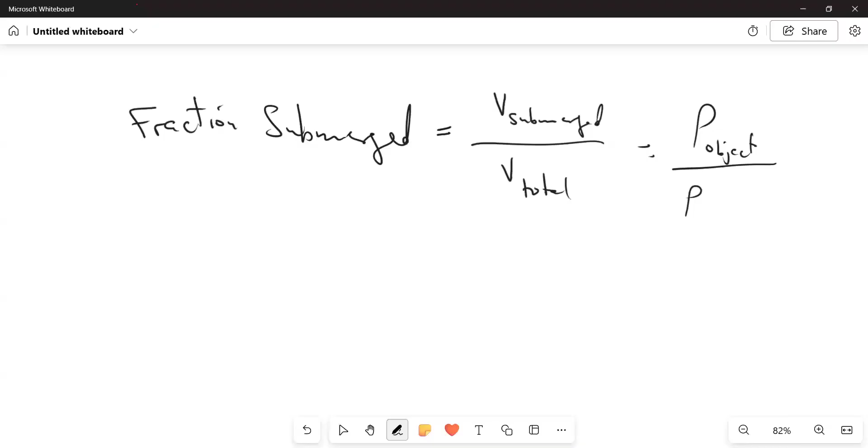Fraction submerged. You can start with this spelling, right? Is equal to the volume submerged over the total volume, is equal to the density of the object over the density of the fluid. Right? So the fraction of the object that is going to be submerged depends on, and notice what I'm saying, the volume that is submerged over the total. So it's related to the density of the object over the density of the fluid, right?

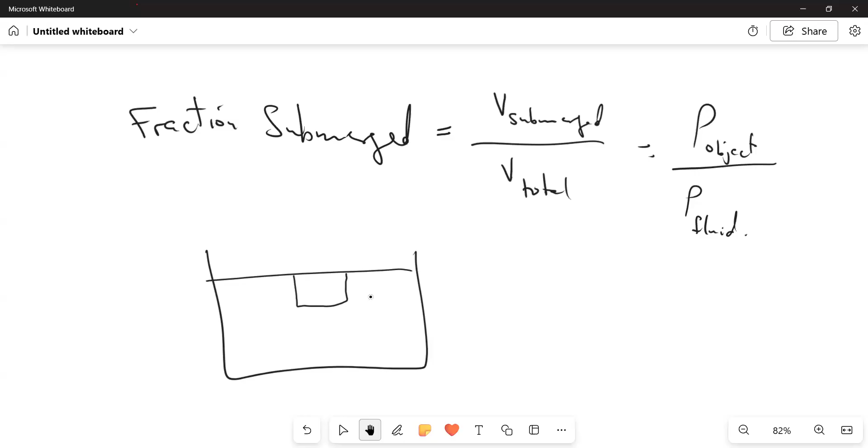So if the density of the object is equal to the density of the fluid, maybe just a tiny bit less, you're going to have a situation where this is the fluid and the thing floats like that, if the two are almost equal, right? If the density of the object is far less than water, you're going to have the fluid, and most of it is going to be above. Even that beach ball one of the girls talked about, the beach ball is going to get a tiny bit under the water there.

Right? Tiny bit. I know you all are going to say the thing looks like it is there on top, but there's a tiny bit under there based on this formula. You must have a piece under there. And that explains also, I'll send you a worked example on YouTube, icebergs. Why do icebergs float like that? They're telling you most of it is underwater, and maybe a teensy-weensy bit up here is above the water.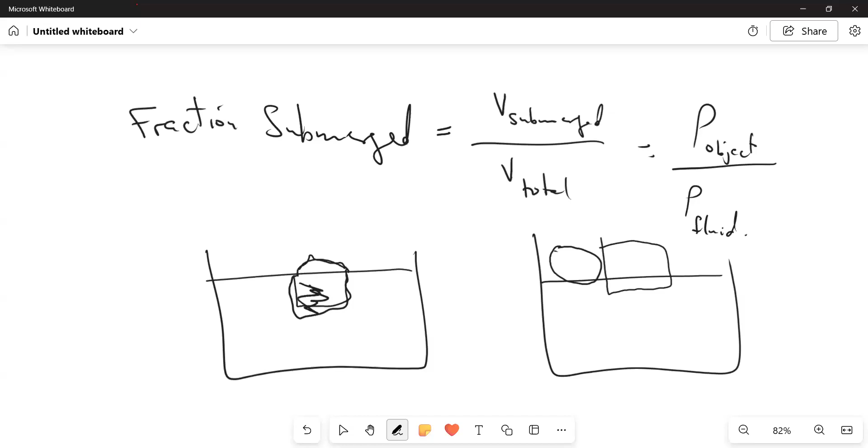Think of this as an iceberg. Most of it is under there. The reason why is that the density of the iceberg is almost that of water. So that's why most of the iceberg is under the water. Right? And I'll send you a worked example to highlight that. So now we're talking about this here, and I want to just touch on one bit before we close.

Again, we're coming back to this matter of safety. Does your work involve you traveling over rivers or water? Maybe you have to go into an interior location. Anybody here? Yes, sir. Okay, one person says that. Maybe a few of you, right? You'll have to travel. Maybe you have to come over the river with a speedboat. Some of you have to go into interior locations, all of that, right?

Now, no matter how good a swimmer you are, let me tell you, I'm a very good swimmer, but I've learned the lesson. Never be too confident in your swimming ability. And I'll tell you two situations, and I'm coming to the safety aspect now. When I just got married, my wife lived near the river. So I went to visit my in-laws, and they said, come, let me see if you can swim. So I went to the river corner.